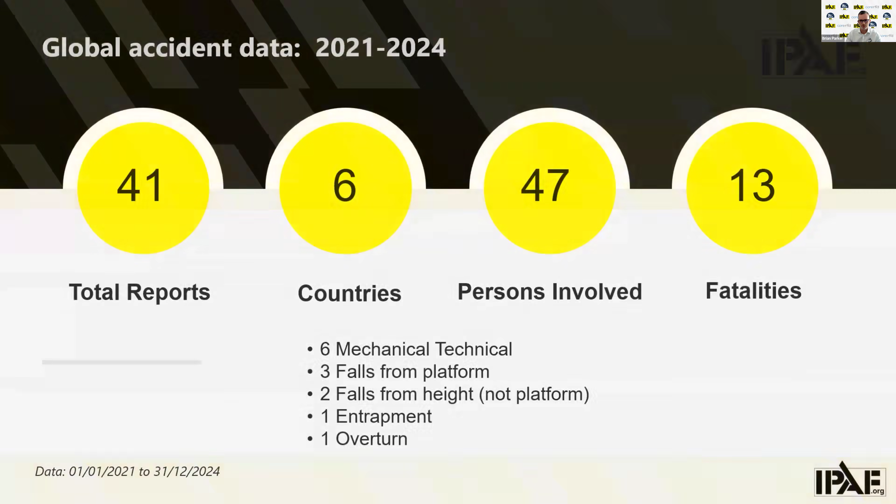So let's jump into the numbers. This is the global accident data from 2021 to 2024. You can see over that 4-year period, we've had 41 reports with 13 fatalities from 6 countries. 47 people have been involved, and you can see the types of incidents there. Now they're the fatal numbers. So 6 mechanical/technical, 3 falls from platform, 2 falls from height which were not from the platform, so normally climbing in and out, 1 entrapment and 1 overturn.

So again, if we're going to look at why we're doing things like this in this webinar, this is to highlight these things. The one thing I will say is that I think they are highly underreported numbers. You are all capable of registering for the IPAF accident portal and putting your incidents and your data into the portal and making sure that it really reflects why we do these webinars and what information we have. Without that, we can't then look at guidance, we can't look at training courses and update them accordingly.

So I do really today ask all of you who are here attending today to help us in terms of reporting your incidents, accidents, your near misses, the issues that you may have, mechanical or technical. They're the kind of things that we really do need that information on.

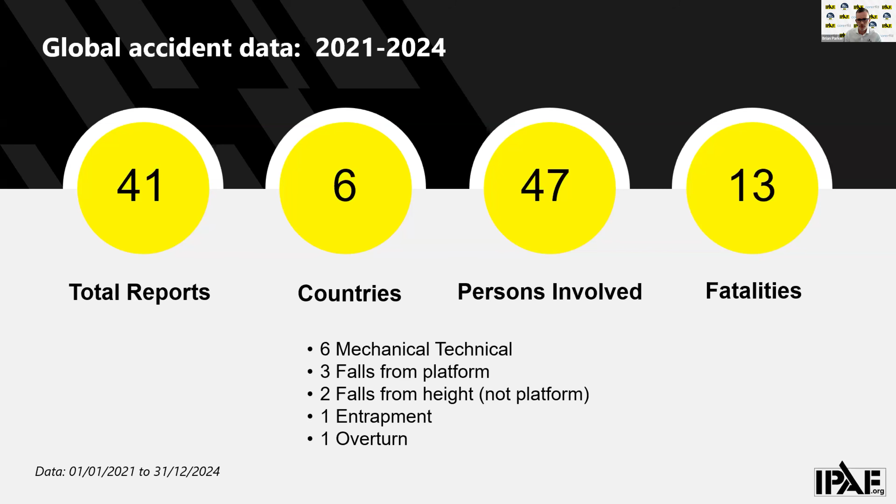Now, when we look at the 2025 data, and this is provisional data at the moment, we've only received 5 reports from 3 countries highlighting 4 fatalities. So out of those 5 reports, we've had 4 fatalities already. 3 of those fatalities were falls from the platform, and 1 fatality was an electrocution. So that is what has been reported into the IPAF accident portal.

For both of those past slides, we don't carry out any investigation ourselves. What we certainly do is ensure that they are not duplicated reports and that we are accurately relaying the information and the figures into any global safety report that we produce, and of course the relevant safety committees and technical committees. Okay, so hopefully that sets the scene.

We're now going to touch on a couple of tragic incidents. This incident occurred on the 11th of December 2023 when 5 workers were killed when a construction hoist collapsed, approximately 20 meters, at a residential project in Stockholm. The subsequent investigation by the Swedish authority determined that several nut and bolt assemblies that should have been secured to the mast sections were missing, leaving joints largely held by friction alone. The authority linked the failure to shortcomings in assembly checks and safety inspections.

In Switzerland, in a place called Lausanne, on the 12th of July 2024, 3 workers were killed and multiple others injured when a combined scaffold/transport platform setup collapsed on a 19-story building. While the investigation on this particular one is still ongoing, authorities have confirmed a large-scale structural collapse across several lifts of the scaffold. Now, for our purposes, the lesson is about interfaces here.

Whether a hoist or a transport platform is tied to a scaffold, the loads, the anchorage, the sequencing and inspections must be engineered, they must be documented and, of course, verified, especially during any alterations and site conditions that may change. So again, another tragic incident, underscoring the absolute aftermath of something like this occurring.

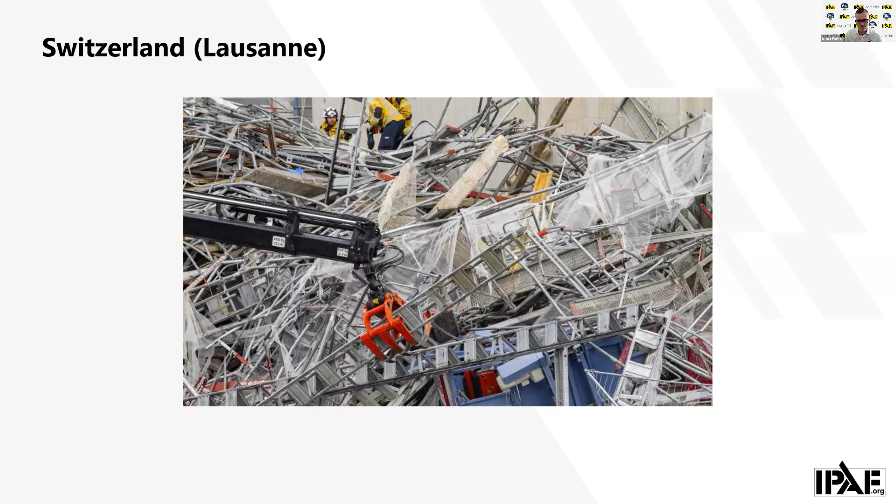And then this year in Naples, 3 workers were killed at a renovation site when a transport platform reportedly tipped and fell several stories. Early accounts suggest a possible overload scenario. There were 3 workers plus the materials, followed by component failure and overturning. So, understandably, a formal investigation was opened by the authorities.

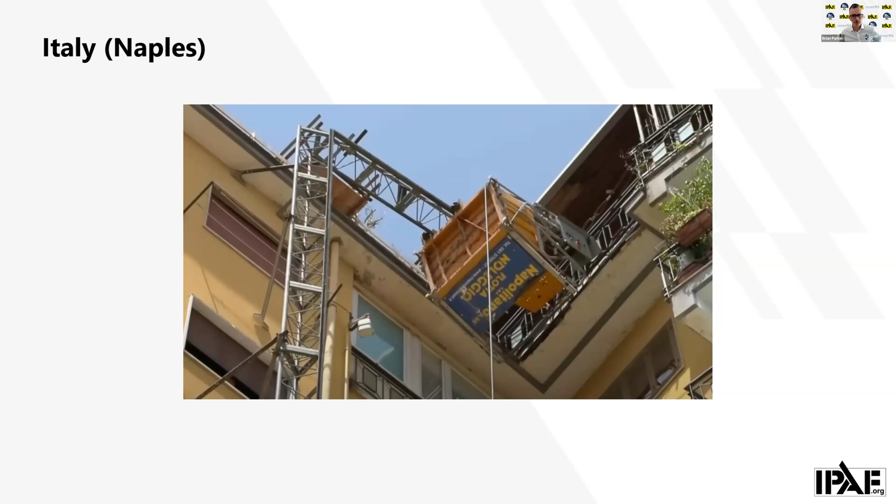Regardless of the final legal findings, this incident highlights essentials that apply to all personnel and material hoists: strict control of rated loads, securing of loads within the car, the basket, regular inspections, training, supervision, and monitoring. And again, another tragic occurrence there.

So, I'm going to now move on to the statement that IPAF issued a couple of months ago on the misuse of transport platforms. We're addressing instances where in some European countries, equipment that looks like a transport platform is being used beyond what the European standards allow. This creates a gap between appearance and lawful operation.

So IPAF recently issued a formal safety communication to clarify the issue, set out the risks, and guide the sector towards a standard-based practical response. This message that we've given in the statement was for everybody in the chain: the manufacturers, the rental providers, contractors, and the duty holders, because decisions at any point can affect safety on site.

So I'll dive into what's happened and why it's a problem. Now, some of you, if you're not in the region, may not know anything about this, but you may have seen the statement that's actually come out from IPAF. So certain suppliers are marketing what they call transport systems or the like that to the eye resemble transport platforms, but they actually aren't transport platforms.

The issue is around performance and safety systems. Some machines exceed 0.2 meters per second or can carry more than 7 persons, which places them outside EN 16719. At the same time, they do not meet the requirements for passenger hoists, EN 12159. So the additional protective measures you would expect on a passenger hoist are therefore not present. Now, we have anecdotally had references to third-party approval. That does not alter the fundamental mismatch between the machine's behaviour and the standard that should govern it.

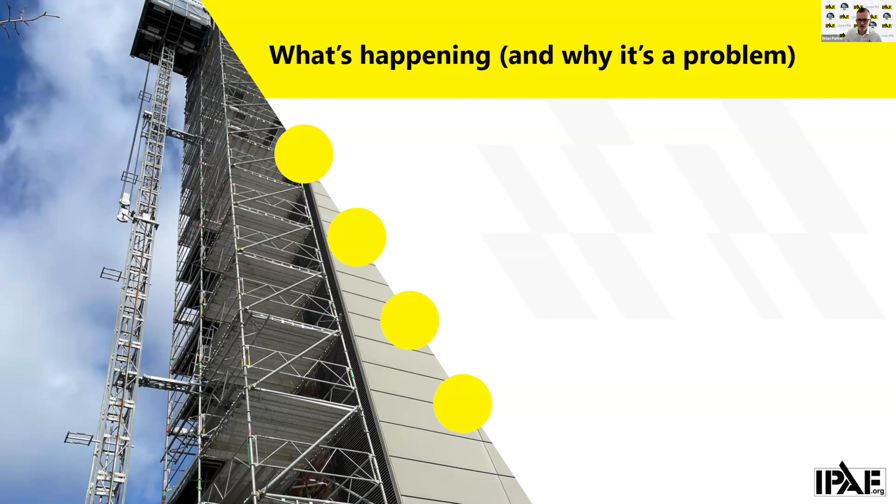So this is something that, and apologies, I forgot to click at the same time. So if you can see there, again, when we've got those kind of things, these are some of the things that you need to be very much aware of. So my apologies, I forgot to click there.

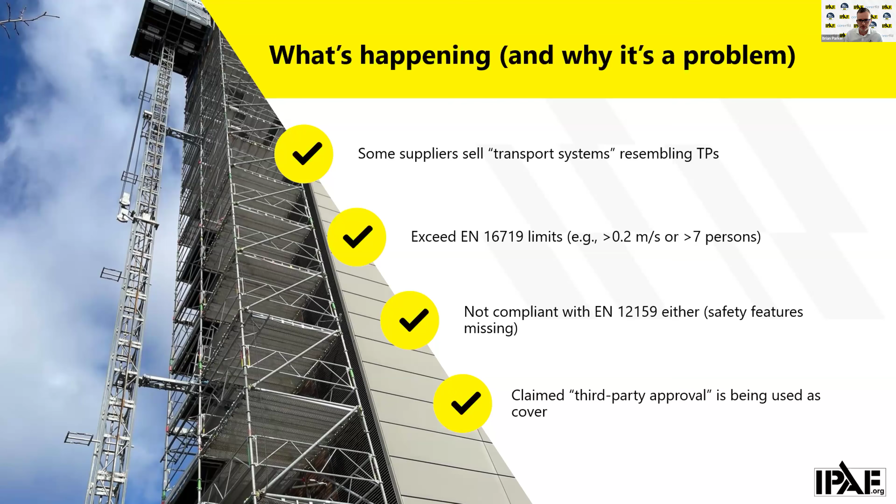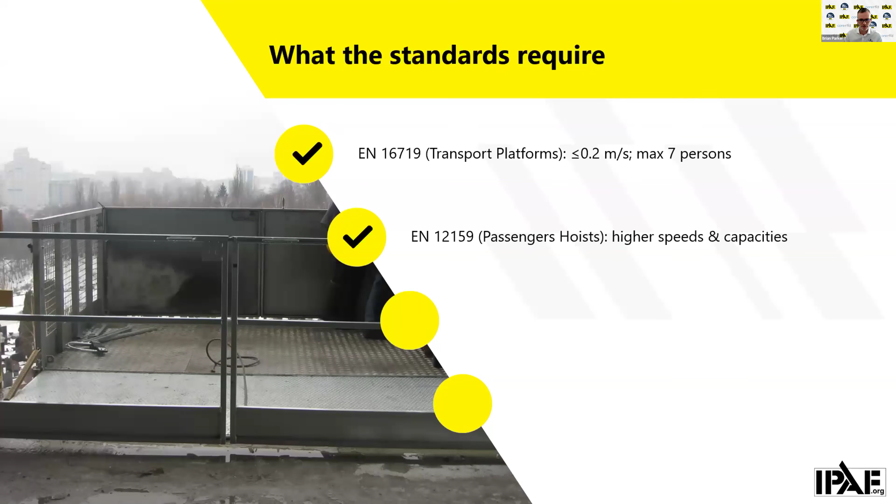Okay, so what the standards actually require. EN 16719 sets clear boundaries for transport platforms, lower speeds, limited persons, because the control measures are calibrated to that level of risk. EN 12159 for passenger hoists permits higher speeds and capacities, but only when the machine is designed, built and operated as a passenger hoist. And that also includes a number of additional safety measures built in. With passenger hoists, there are stringent safeguards such as enclosed cabins and controlled landings. They are integral to safe operation at higher performance, and they're not optional.

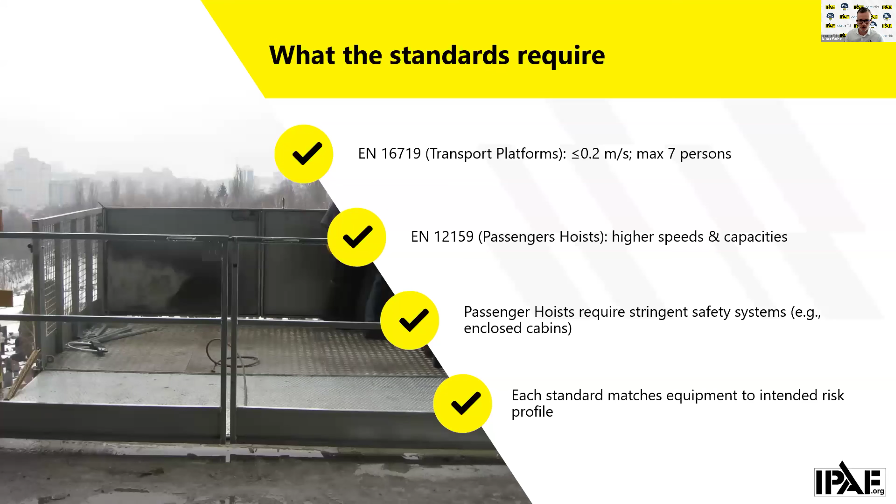But the core principle is alignment. Capability and controls must match the intended risk profile, and the chosen standard must reflect the way in which the machine is actually being used. So what are the risks of ignoring the standards? Well, operating outside the appropriate standards elevates exposures for users and anyone working nearby, making foreseeable harm more likely. In the event of an incident, non-compliance can trigger criminal or civil proceedings and potentially complicate insurances, regardless of any marketing claims that this organisation or that organisation may make. You are not in between two standards.

And I suppose it doesn't need me to stress, but one serious incident can ripple across the industry, and that's going to undermine confidence in products, projects, providers, and, as we've seen in some other industries, they will stop using that product. They will then move to other products instead. We're trying to ensure that we are correct, and we urge you to take action if you do see these products.

So what IPAF is urging, and certainly the next steps: set and apply the correct standard for the machine and the task. EN 16719 for transport platforms within its limits. EN 12159 when passenger hoist behaviour is required. Challenge descriptions that blur categories; a label cannot replace the protections mandated by the right standard. If it is a transport platform, keep it within the 0.2 meters per second and 7-person limits. Exceeding them changes the risks and the rules.

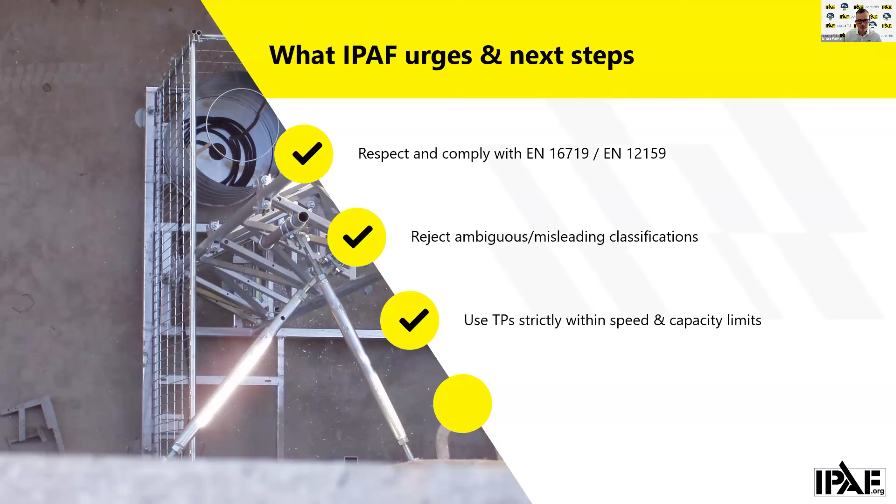Where you do see misuse, if you are identifying it or you are made aware, raise this with IPAF, and IPAF's intention, like the statement said, is to raise the specific cases with the relevant national authorities where we're seeing this happen. So if it happens in a certain country, our intention, if this does not stop, is to raise that with the national authority. Now, for further clarification or to discuss any particular case, please do contact IPAF. Early advice prevents avoidable risk later. So raise that with myself at IPAF, and I can take that to the relevant chairs of the committees.

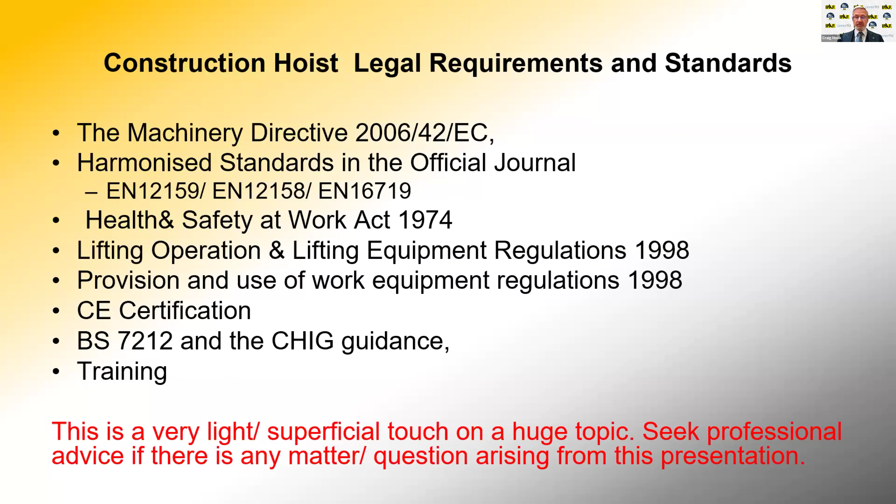This is a massive topic. We are just going to do a very light touch over the top of these things. If this is raising any questions for you, then come back to us and then we will be able to hopefully answer them. Yes, it's massive and there's all sorts of intricacies because it's European legislation and it's complicated. So we'll do our best to support you.

Now, we have these directives. We've got the Machinery Directive, which is our current standard for keeping and having a piece of machinery that's safe to use. That will be being replaced on the 20th of January 2027 by the Machinery Regulation. So our standards are all changing to reflect what the Machinery Regulation is requiring. It's got some new elements in it that are relevant.

The reason we have this directive or the regulation is because we have hazards. Hazards are created by using pieces of equipment. You can't help it. You're working at height. You're using a structure, a lattice structure maybe, which might suffer from a collapse, of which we've seen examples of today already. So these elements of these hazards that are presented in either using a piece of equipment or putting it to work need to be dealt with.

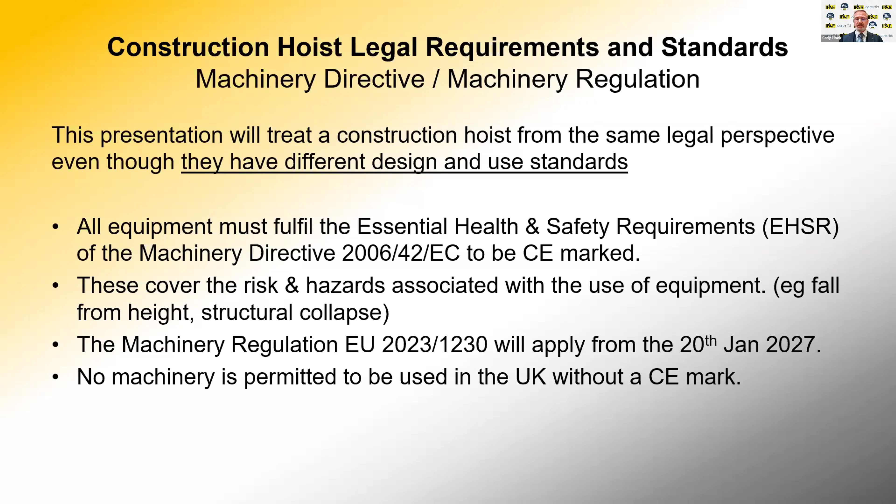And so there are a series of things called essential health and safety requirements that are laid out in the directive and the regulation. And we need to make sure that those essential health and safety requirements are understood by the manufacturer and control measures put in place to either eliminate or mitigate those risks. And if you do all of those things, you have this marvelous thing called a CE mark, and it allows you to then sell your equipment, certainly into the UK. We have a requirement that all of these things are CE marked before we're allowed to use them.

One of the challenges, though, is that these health and safety requirements are very general, and it's very hard to go, well, what does that actually mean for a designer? And there are many, many of them, and not all of them relevant, and some are worded in such a way you think, well, how am I actually going to do that? So to help people, we write European standards. So there's 3 examples of European standards written on the screen.

And these documents provide a state-of-the-art way for dealing with the health and safety requirements. And they're written by manufacturers coming together and also users to say, okay, we've got to keep people safe at work, safe using this piece of equipment. How are we going to do it? What is state of the art at the moment?

Let's have a gate. Oh, yeah, but not just a gate. Let's have a gate that's interlocked. Let's have a gate that's got mesh in front of it so that we can't lose materials through it. Those sorts of ideas come from bringing different manufacturers together as different users to allow us to come up with a sensible way to come up with a design that we can then apply to a piece of equipment.

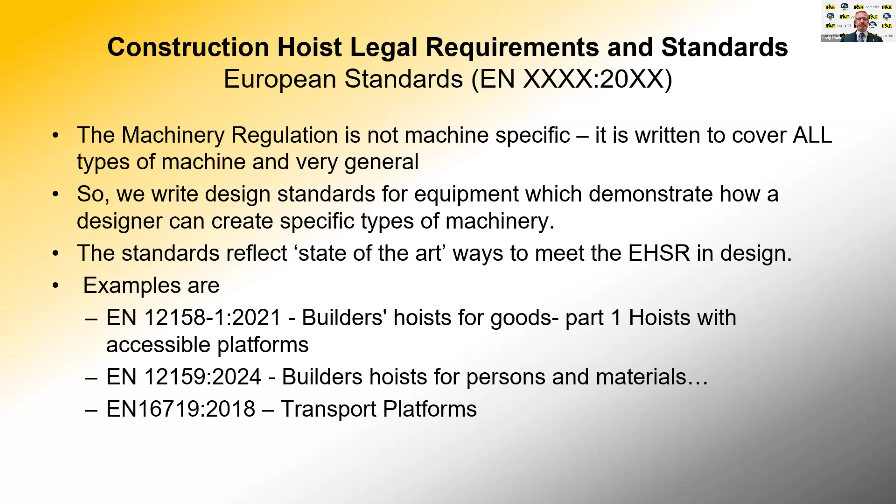Now, we've got our design standard. A manufacturer will take it, come up with a design, but how does that turn into something that we can actually use, that we can be sure is safe to use, that it has actually dealt with all of the essential health and safety requirements?

Well, there's a requirement on the manufacturer to create a technical file. Now, the technical file is theirs. It's for them only. It doesn't get shared. It is very unlikely as a user that we would ever get to see the technical file. The regulator, however, can ask to see the technical file if there was an incident, for example.

So the technical file must exist. It must cover all of the elements of the essential health and safety requirements, because you're demonstrating we've done all of these things, which we've done through working to the design standard. Now, in order to ensure that all of the relevant elements have been dealt with, as a manufacturer, you'd have 2 ways to prove that.

You could use a notified body to do a type approval. So they would look at the technical file, look at the piece of equipment, look at some testing and go, great, yeah, everything's compliant, and they'll issue a certificate of conformity. There's another way of doing it, which leads to a declaration of conformity. So it's a subtly different piece of paper.

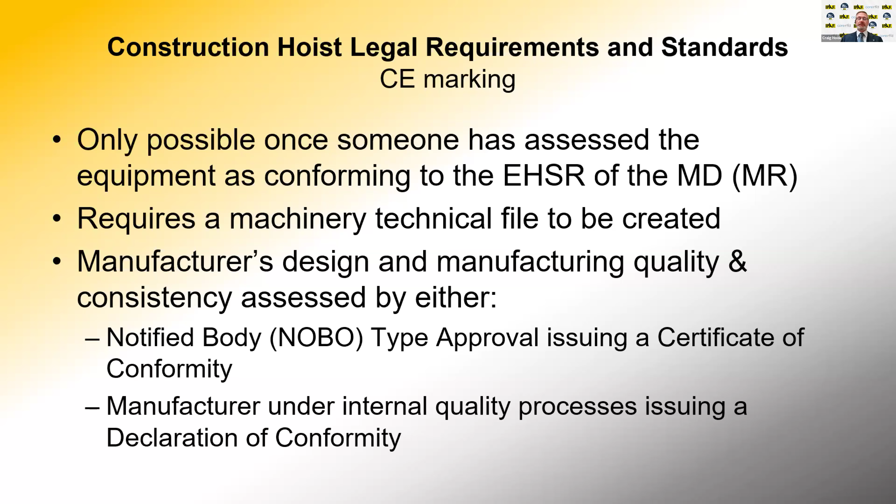And that's where a manufacturer effectively self-certifies through their own processes that we've met all of the essential health and safety requirements. Once you've done that, you can then put a CE mark on your machine, and you will be able to declare that on the COC or the DOC.

The challenge you have is that some certificates that have been seen have been faked. The equipment hasn't had that proper set of checks done in the background. Yes, it is a minefield, and no, you can't always trust the piece of paper. However, there are ways of checking whether you've got a fake or a true certificate, and that can be done through the European Union website. You can have a look there.

And then for us as the user or the owner of a piece of equipment, we would want to be keeping a copy of that document along with other certificates of incorporation. So where you buy a component, a mechanical assembly that you want to use inside your hoist or your transport platform, like a motor, a gearbox, a safety device, something like that,

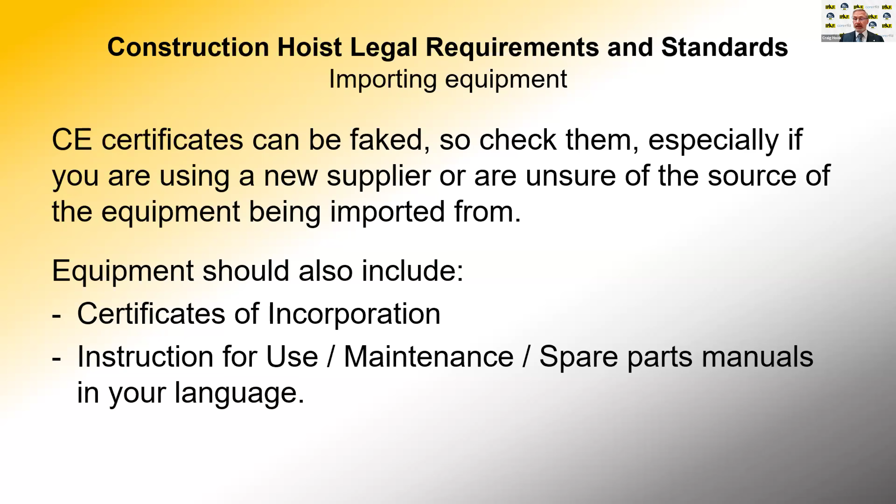you would supply all that information out to the eventual owner of the piece of equipment, so they've got everything they need to use the piece of equipment safely, along with instructions for use, maintenance instructions, and spare parts manual, hopefully in a language that you can understand. So in theory now, we've got a piece of equipment that we're ready to start using. It's been properly designed, but we now have to use it in the right way.

And that may well mean that we've got to import that piece of equipment to a different country. So at that point, as far as the UK is concerned, the importer effectively becomes the manufacturer. They're taking on those responsibilities, saying, we've bought this and we guarantee that it is as per the essential health and safety requirements. And so the importer has quite a responsibility. They need to know they're buying something that is good and safe to use and meets all of the criteria. So importers, buy wisely and always do your due diligence.

Manufacturers, as we know, they've demonstrated that they've done their element. So when we think of the Health and Safety at Work Act in the UK, our overarching document that governs health and safety at work, you've got specific requirements in Regulation 6 to do with that.

But then when you look at other regulations in the Health and Safety at Work Act, they would apply to the rental company, to the hirer, and to the user about making sure that equipment's properly maintained, that it's been installed properly, that we've actually thought about lift plans and method statements and risk assessments and safe systems of work and maintenance and records and trained and competent people. All of these things are really, really important.

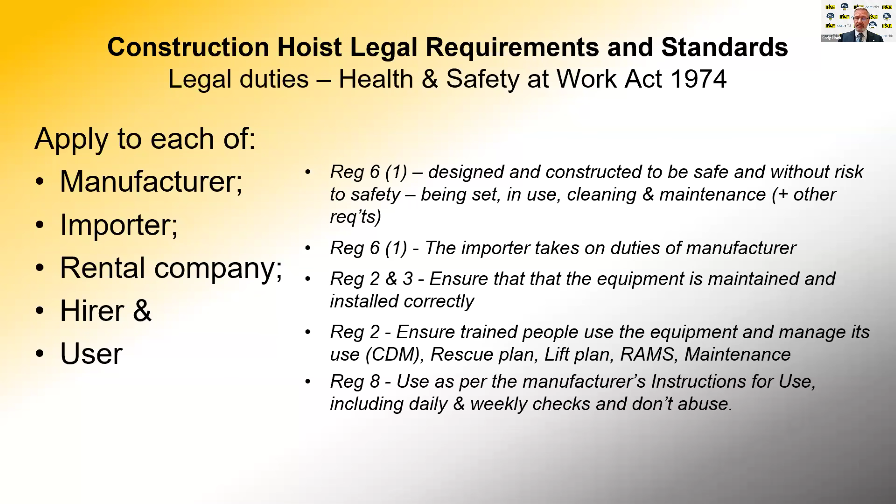And the Health and Safety at Work Act gives us an overarching responsibility. But then to help us out, because it's not always easy to understand all of the responsibilities, there's other subsidiary legislation that will support that, PUWER and LOLER.

So the Provision and Use of Work Equipment Regulations is for all work equipment, of which lifting equipment is kind of a subset. So you've got PUWER over the top of it all. And PUWER says, well, pick the most appropriate piece of equipment for the work that you're going to do. So I've got a choice of a transport platform, a goods hoist, a construction hoist. How do I pick which is the most appropriate piece of equipment for the activity that I'm going to do?

So PUWER Reg 4 says choose wisely. Write it down ideally, and then you can demonstrate you've thought about why you're using that piece of equipment. What's my task? What's the environment that I'm working in? The availability of manufacturer's instructions and maintenance requirements, again, is a requirement of PUWER. And then making sure that when it's installed, it's inspected, and when it's erected, it is inspected. And we look at more detail about that in LOLER. That's unpacked in a bit more detail.

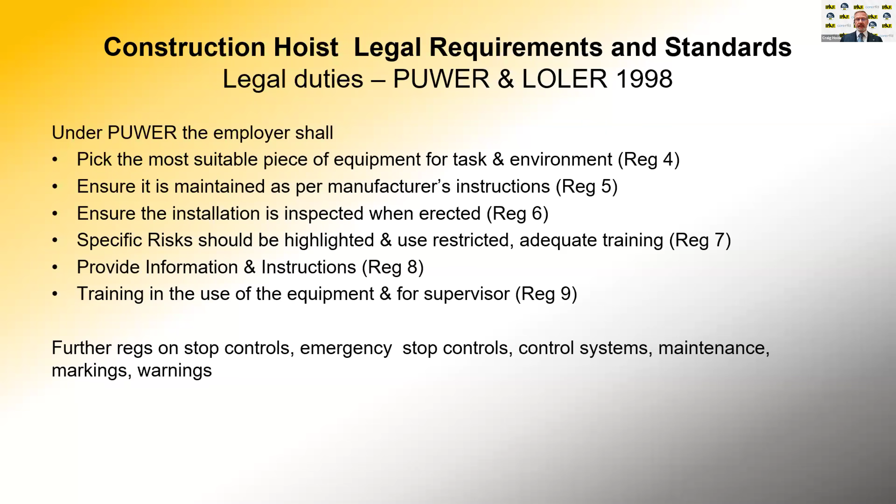We think about specific risks, restrictions of use, making sure that people are properly trained. We've got the right information and instructions available to people. Do supervisors know what they're doing? These are all really important elements, which again even more detail is given to us in LOLER. So our Lifting Operations and Lifting Equipment Regulations, which place specific requirements about safe working load for correct configuration, because machines can be configured in different ways. So let's make sure that we tell people how it's safe to be used and that it's configured properly.

As we were just hearing from Brian, thinking about the transport platform, does it have a roof on it to allow you to put people in it? Is it fully surrounded? In that case, if we need that, we should perhaps be using a construction hoist. And there's all sorts of elements that you need to be careful of. And so having a conversation with the supplier and understanding your own duties, understanding the piece of equipment will help you pick wisely.

We need a plan, a written plan in Reg 8. And then we think about thorough examinations in Regulation 9. And what does a report of thorough examination look like? Again, this is really important, and that's explained in Schedule 1 of LOLER. And even now, when we're doing our own checks amongst our supply chain, we sometimes find that reports of thorough examination aren't laid out correctly, don't have the right information in, particularly the safe working load, surprisingly. That should be fairly straightforward, you would think. The importance of reporting dangerous incidents and defects is a requirement of LOLER. And again, your declaration of conformity is really important.

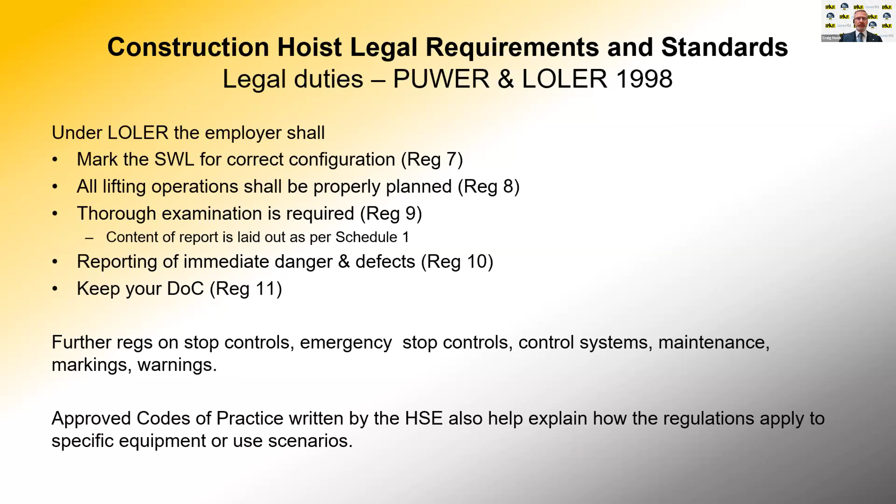So beyond these elements of legislation, of regulation, the HSE provide approved codes of practice that help us to understand particularly how we can do this. But then there's further guidance provided, which is not legal, but is really, really helpful. We've got the British standards, and we've got the CHIG, that's the Construction Hoist Interest Group, and IPAF documentation that sort of help unpack how do we make sure that we're legally compliant in a sensible, practical way.

You can't put all of the detail into a British standard because it might be manufacturer specific. Well, we want to give good advice. So in the British standards, it's general good advice. We'll talk about gates, we'll talk about ties, but we won't necessarily go into the detail that you can do in CHIG or IPAF guidance. So there's elements there where they work really well together.

If you don't follow the guidance, you could be in trouble. Not only might you have an incident; if you were to have an incident and the HSE or equivalent enforcing authority was to come and look at what you've done, they would be saying, why did you do it like that? You have examples here. What's going on? Why have you deviated from what would be considered to be good practice? So follow the guidance that has been provided to you would be my advice. And if you're going to do something different, find a better method. Don't find a less good method.

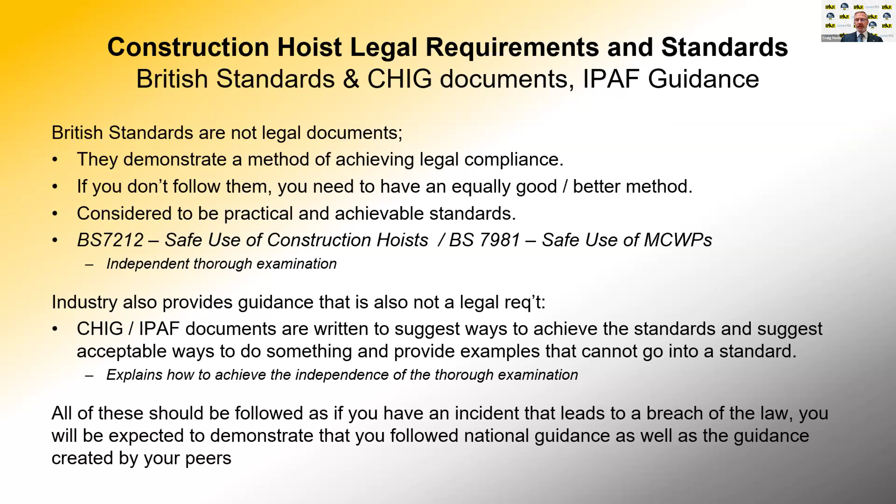It is important that we follow this guidance, and you'll find that the HSE or equivalent will look and go, why have you not followed the rules? Why have you not followed the guidance? Why have you not looked at these examples? They're there to help you. They've been created by your peers, by people like Brian and myself who try and help highlight what's good practice.

Ideally, you will have some initial training, and then you'll move on to maybe some form of an NVQ, which is an assessment of your training. I won't talk any more about that because Rupert will unpack that in a little bit more detail. But primarily, I want to encourage you all to make sure that you plan your work, that you manage your work properly, that it's all coordinated and monitored as per our requirements of CDM. These are essential things that will help us to keep people safe at work.

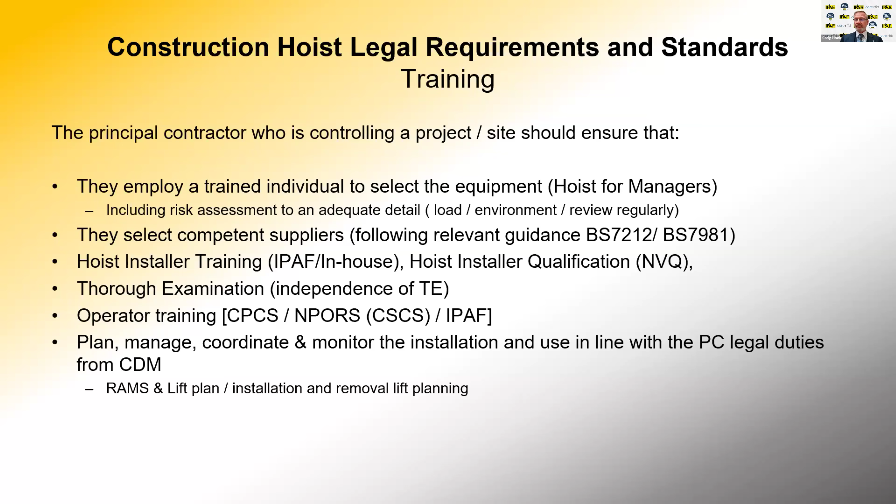Okay, so I'm going to take the next step. I'm going to go beyond the standards and how I see implementing of hoist training globally, which, let's face it, is a pretty tough nut to crack. So I'm going to start by breaking it down. Initially, I want to point out some of the benefits of training. Now, I don't wish to state the obvious, but I think it's important to set the scene.

First of all, safety, promoting safe operation and reducing accidents. Compliance, as we've just heard, helps meet the legal regulations and industry standards. Efficiency, we can improve productivity and minimize our downtime. Consistency in the training specifically will help build trust through the global standards. And career growth, something that most of us in the construction industry are seeing as an issue, is encouraging people and new talent to join our industry.

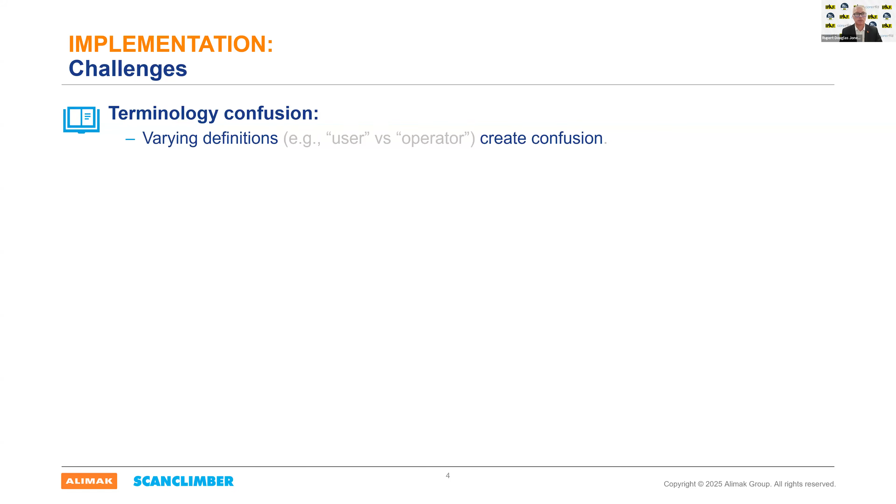So what are the challenges in the implementation? The standards: there can often be terminology confusion. User versus operator is one which we see regularly, which can create confusion about what should be used in each region. The cultural and regulatory barriers.

In some cases, you'll see local resistance to external standards coming in, and this leads to differing expectations, especially examples that we've seen, such as practical versus theoretical emphasis. You'll see more of this now as people look towards e-learning courses, virtual reality.

Language and translation issues have also caused issues, especially where there may be minor errors which can create very large or abnormally large misunderstandings, especially amongst international or multinational teams. There are challenges with the economic side of life and the disparities. If there are limited resources or high costs of certification and equipment upgrades are not happening as regularly, these will also have an effect.

But we mustn't forget also the legal and liability concerns. Whilst we see in many countries we have a strong enforcement policy, in other countries the policy is nowhere near the same, and they may turn a blind eye to the standards, and there's weak enforcement, and this leads to unclear responsibilities and legal uncertainties.

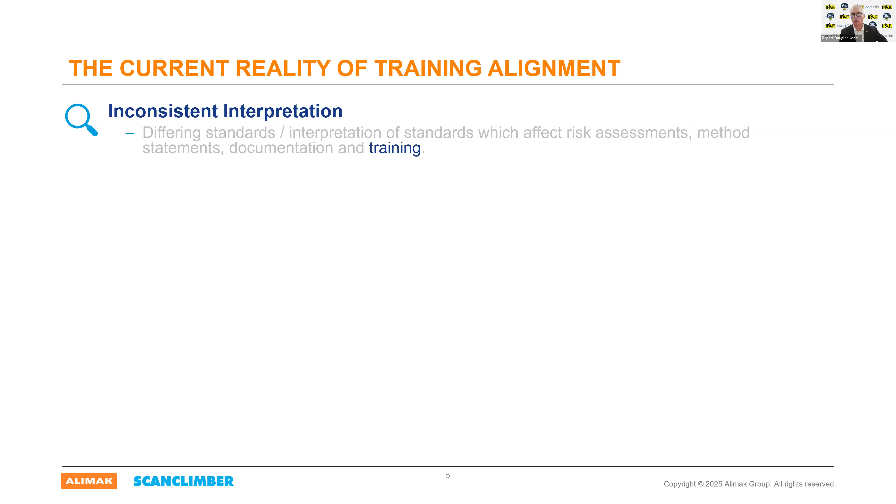Now, it's the imbalance that we've been discussing that I think is worth exploring a bit more. So I want to start by having a look at the challenges affecting training outcomes across the different regions. If you get inconsistent interpretation in the standards from the issues we've just discussed, this will lead to very slightly differing standards or interpretations, and this will have a knock-on effect not only in the risk assessments and method statements, but also in the training that's provided.

The varying approaches in training can lead obviously to the uneven operator competence, and some countries will simply rely upon on-the-job training, and one which we've all faced at different stages would be grandfather rights or legacy, as it may be known in some areas. So different approaches to training.

Other countries, they will simply prioritize the compliance paperwork. Now, what I mean by that is they're looking for a certificate only. What's behind the certificate isn't as important. And this will lead to some short online courses with no practical element. I have seen examples in some regions of courses of 45 minutes online with no practical element at all.

Although we've mentioned translation and language issues already, this has a further effect, not only from translating into the standards, but also translating into the training. And it's worth mentioning again because it repeatedly comes up. The regulatory enforcement differences and the strict enforcement versus the flexible application comes through not just in the standards, but also in the training side.

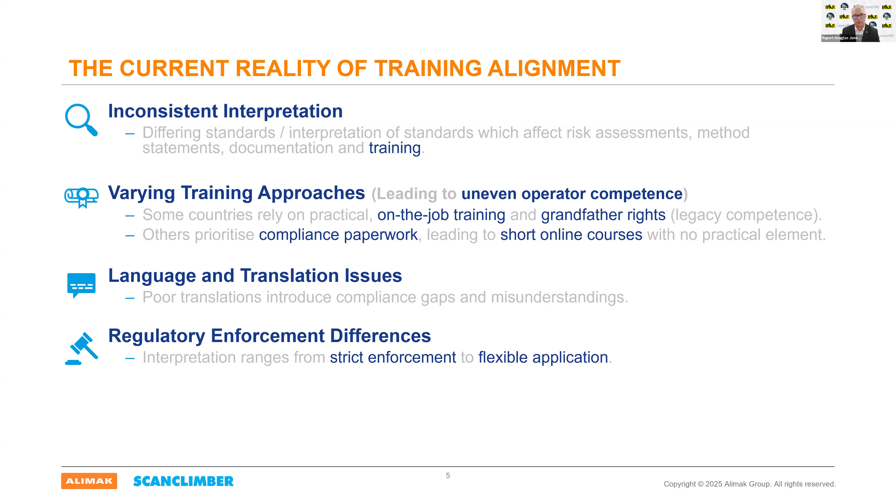And whilst we've mentioned the economic and resource constraints already, these will, of course, hinder compliance in the less affluent areas and certainly have an effect on the amount of training people will expect to see or are willing to pay for.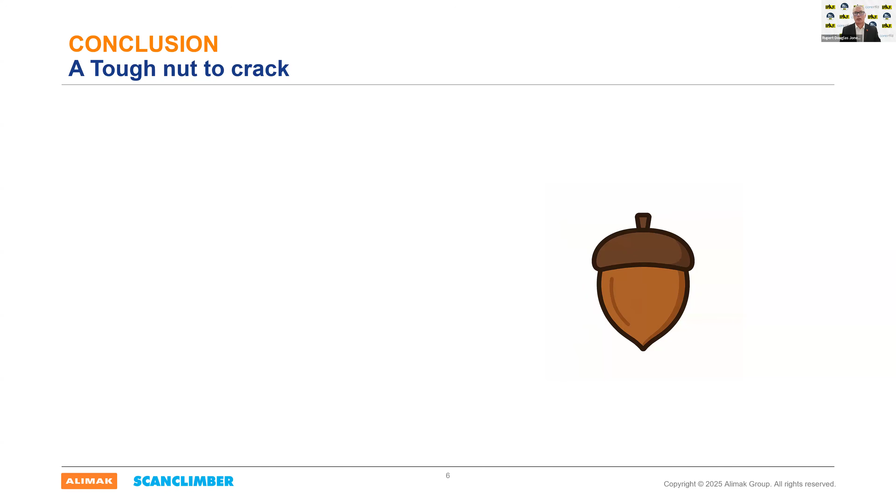So I'm going to round up. So we know that this is a tough nut to crack, not only from the standards and making sure that they are equitable across all regions globally, but I wouldn't mention this without coming up with a solution as well. We can implement hoist training globally, but that's only if everybody plays their part. That will require the standards bodies to define and align clear standards.

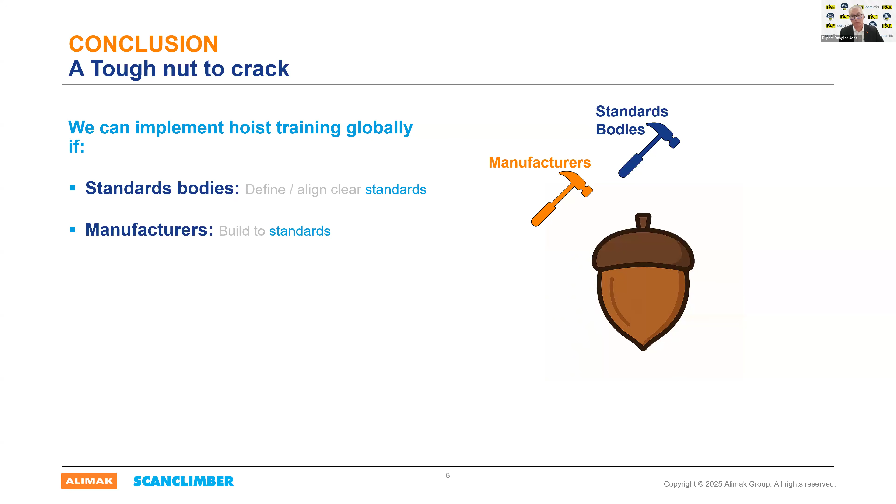The manufacturers have to ensure that they're built to the standards. That's something Brian's already covered earlier today, and it may be obvious to some, but clearly isn't to everybody. The trade bodies, they have an important role to play. They've got to promote the standards and the collaboration across all of the different parties.

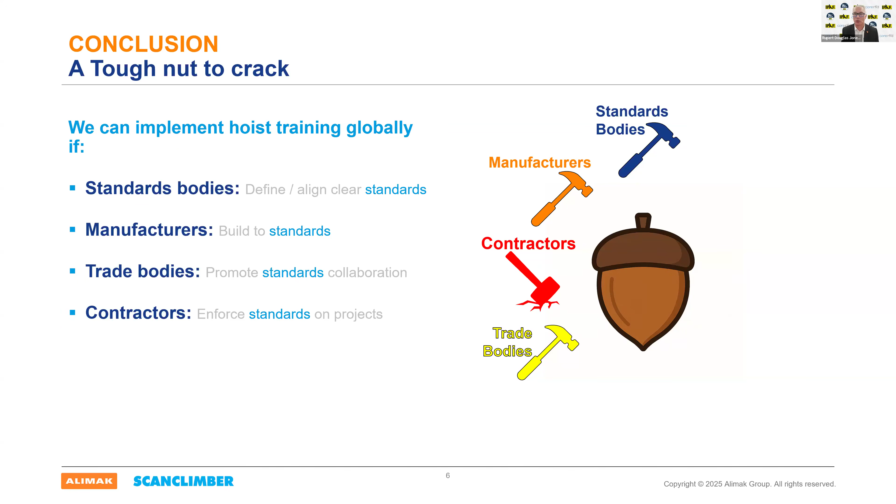Contractors have one of the biggest roles in enforcing the standards on their projects. In certain countries, that will be the difference between the type of training that's demanded and can make an enormous difference. The hire companies, they need to source the right machines and installed to the correct standards.

Training providers should look to try and ensure that their training meets the standards that have been printed. A lot of people will simply write training courses without even glancing at some of the standards that apply. And investigators, we need to help them to uphold and enforce those standards.

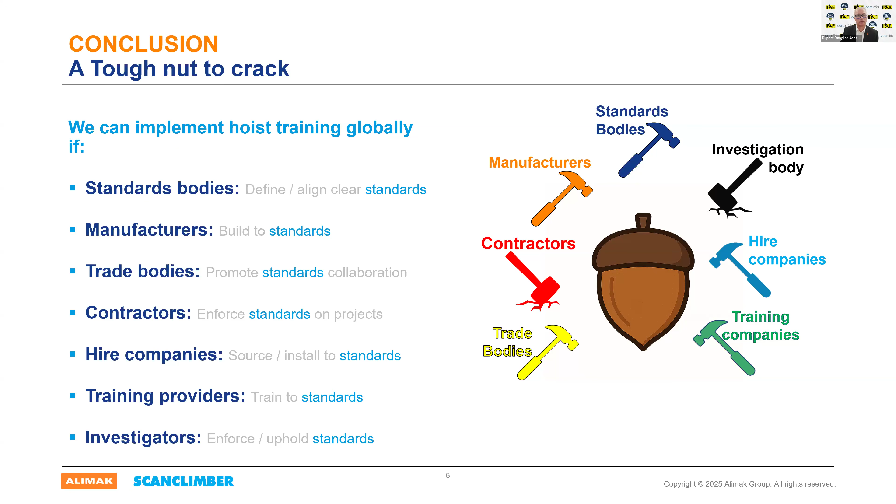Now, if we collaborate and we keep consistent, clear messaging, we can crack this nut, and there will be training consistently for hoist training around the world.

That's it from me. So I'll hand back to you now, Brian. Thank you, Rupert. Great insight into that, and I think hopefully we can collaboratively crack this nut going forward. Obviously, there are a few changes out there, and by changes I mean in respect to the standards.